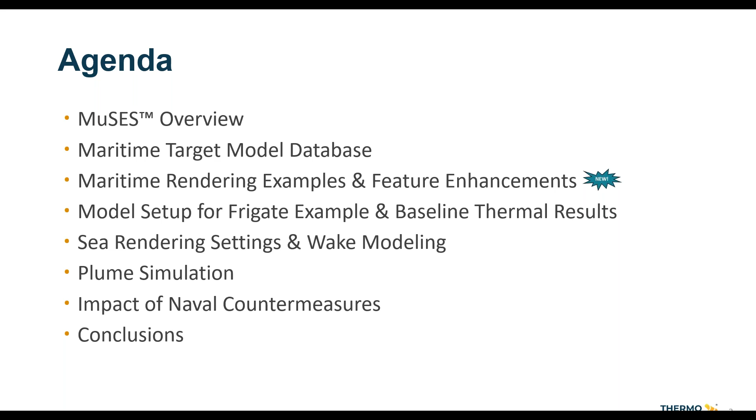We'll start out with an overview of MuSES. MuSES is a thermal solver and EOIR rendering tool, which takes inputs such as a 3D CAD geometry description, part material thicknesses, thermal properties, and component heat sources. Also taken as input are boundary conditions from environmental sources, such as sun location, the sky and background for radiation exchange, air temperature and wind speed for convective heat transfer, and terrain or sea properties to properly set up the analysis environment.

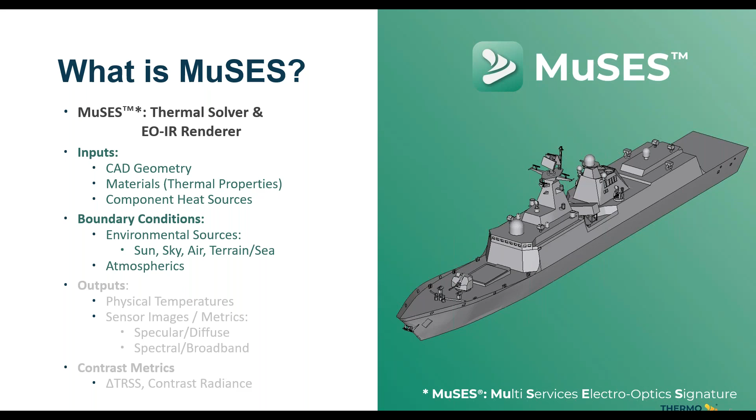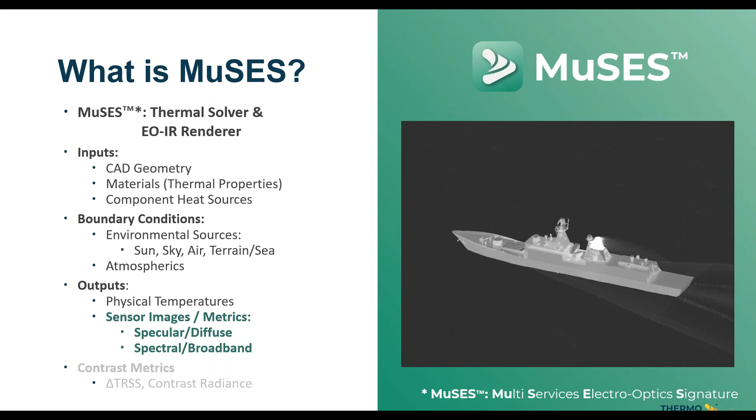Once these inputs are combined, we get a physical temperature prediction of the target. Each element has a temperature result, and you can graphically see this gradient across the target over the simulation time. Then we can also compute the radiance or apparent temperatures for each element, and from there, images can be rendered from the perspective of a virtual sensor, which can be specular or diffuse, as well as spectral or across a broadband. And we can also get contrast metrics such as delta TRSS and contrast radiance.

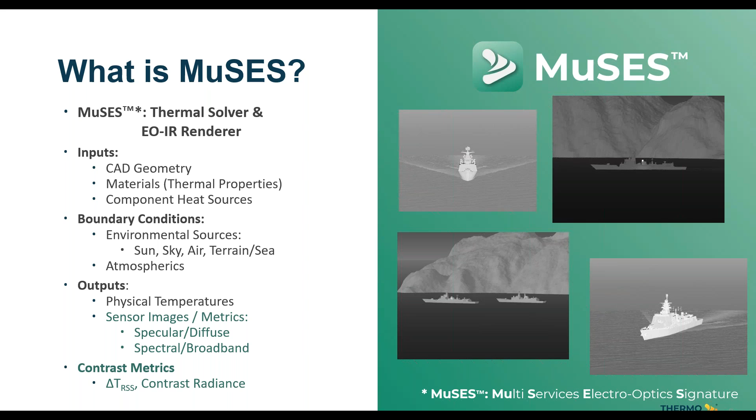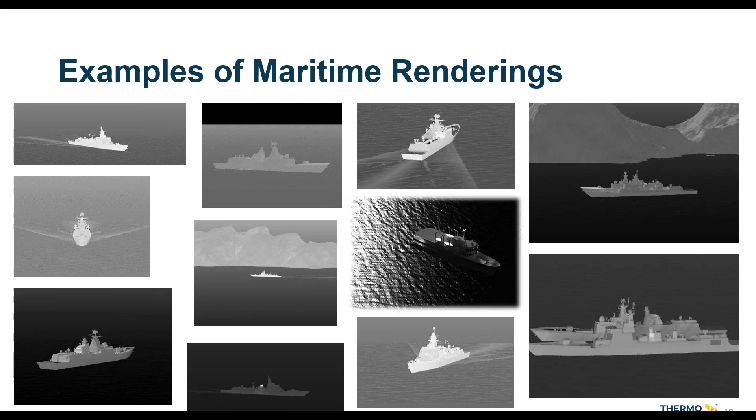Oh, Madison, sorry to interrupt. Can you switch back over? You're showing the wrong screen currently. Oh, not sure how that happened. There we go, does that work? Perfect, thank you. Okay, yep. I don't know what happened. Sorry about that. All right.

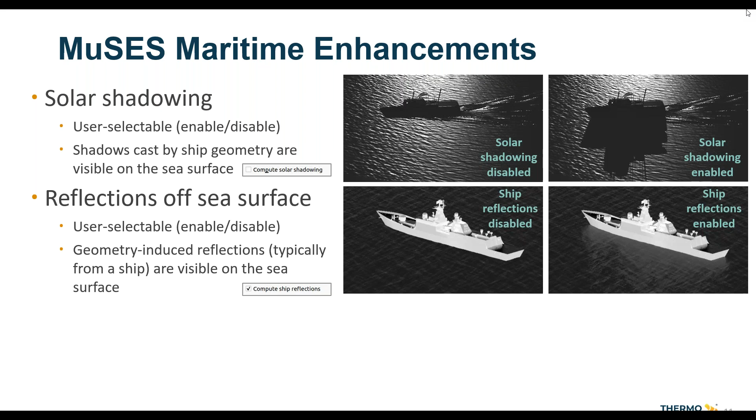Users can also enable sea surface reflections. The image on the right pictures geometry-induced reflections of the ship that are visible on the sea surface.

Now we'll move on to setting up a maritime model using MuSES. We'll need to set up the model environment and can set up a water background for maritime purposes. On the right is our user interface for these settings. Weather can be supplied via a text-based weather file, which contains air temperature, wind speed, and other meteorological parameters. The top image shows where this natural weather file can be selected.

Then a water background type is available for both faceted and unfaceted backgrounds. The bottom right image shows the interface where the background settings are selected. Water temperature is able to be specified or calculated here, and simulation methods, solar absorptivity, and surface attenuation can be adjusted. Selecting the paint code option will allow you to change the sea state, which will then change paint parameters based off of the environment wind speed.

The example model we are looking at today is the Type 054A frigate. The geometry of this ship is divided into 298 parts and has around 73,000 elements. The parts are grouped into appropriate assemblies and assigned proper attributes like material properties and thickness, convection type and parameters, optical surface properties that are housed within paint codes, imposed heat, and initial conditions.

On the right, you can see the ship displayed by different properties. The top image shows the ship colored by convection type, the middle is colored by paint code, and the bottom image displays each part as a unique color.

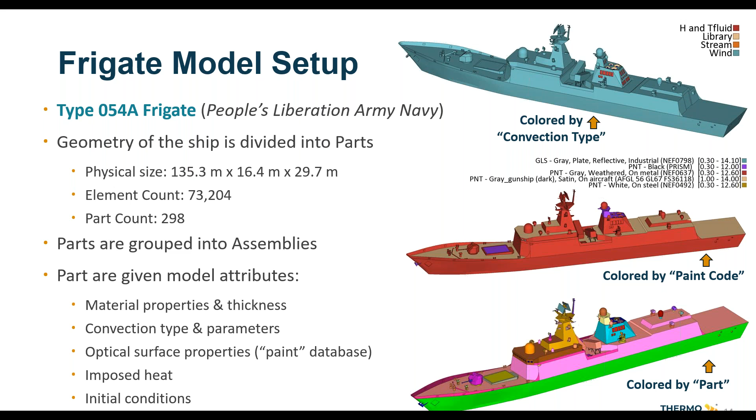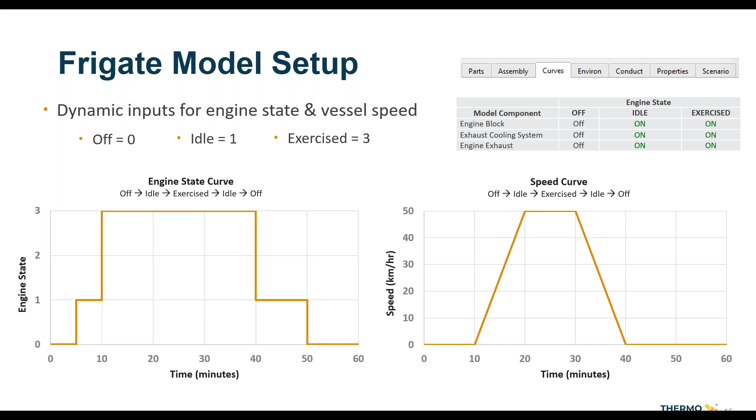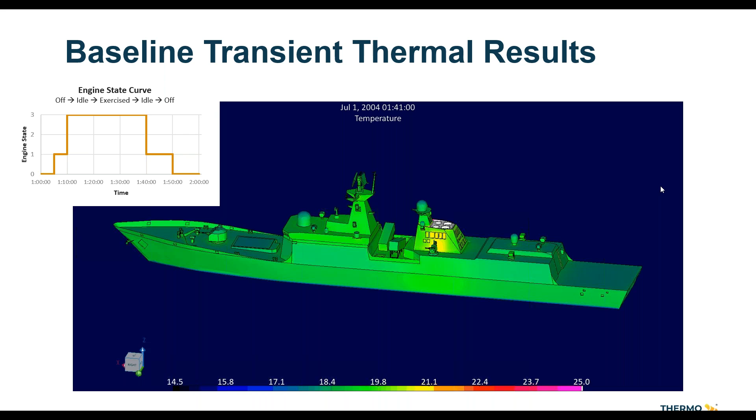Okay, and now I'll hand it over to Corey. Thanks, Madison. I'm going to switch the screen presentation here, 1 second. All right, hopefully that's showing up for everybody. Does that look good, Chris?

MuSES allows for unstructured seas to be rendered, where the sea radiance is going to vary pixel by pixel, but there are no explicit facets for the geometry that capture waves, just the radiance effect of the waves. But what we're going to look at today is focusing on the structured sea, where there are geometric facets that are generated to represent the sea of choice for the user.

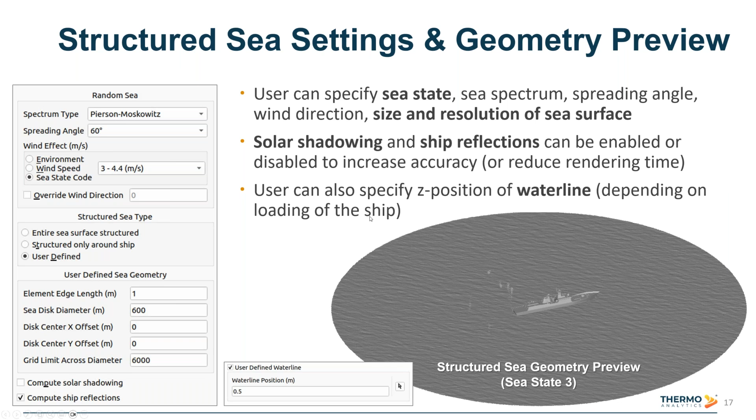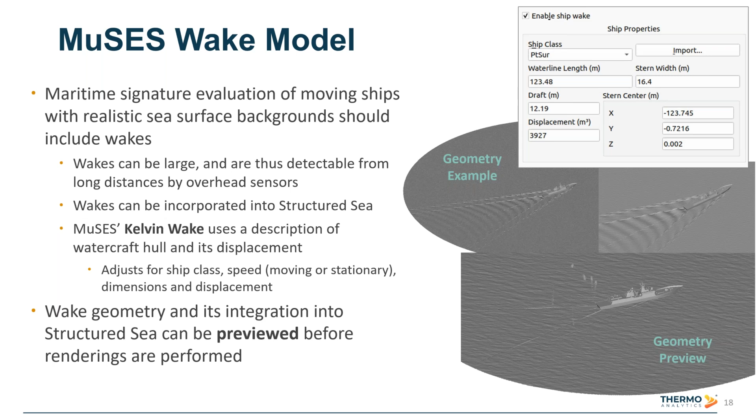Okay, so now we're going to move from wakes to talking about plume modeling a little bit. So MuSES allows users to incorporate plume radiance into EOIR signature renderings. And the way this is done is a CFD analysis is done in an external tool, and the volumetric CFD results from that tool are used to determine the plume signature. And so the output of those CFD tools are things like the temperature distribution in the volume and the gas species concentration in the volume for the different species like CO2, H2O, and soot that are typically present in the plume itself.

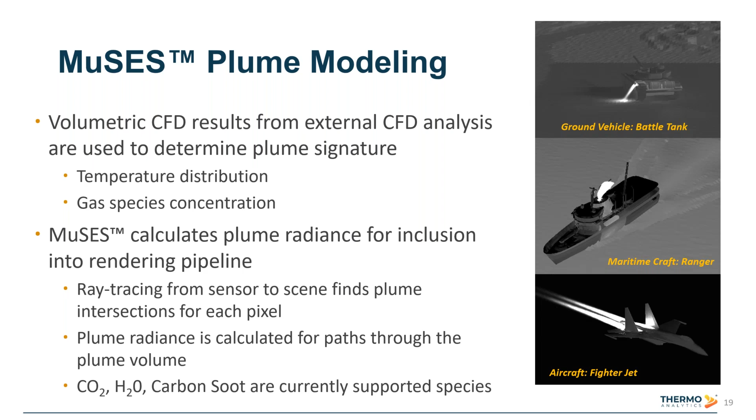So now we'll move on to talking about a few different naval countermeasure examples and show how the effectiveness of these countermeasures can be evaluated with MuSES. And the purpose of this is not to make recommendations, but just to show some demonstration examples.

And we'll be looking at 3 different countermeasures in today's webinar. The first being ambient exhaust entrainment. The second being the application of water wash to the ship's surface. And the final one being the inclusion of flares. And so we'll have a before and an after version of the frigate to compare so that we can see the impact of each of these 3.

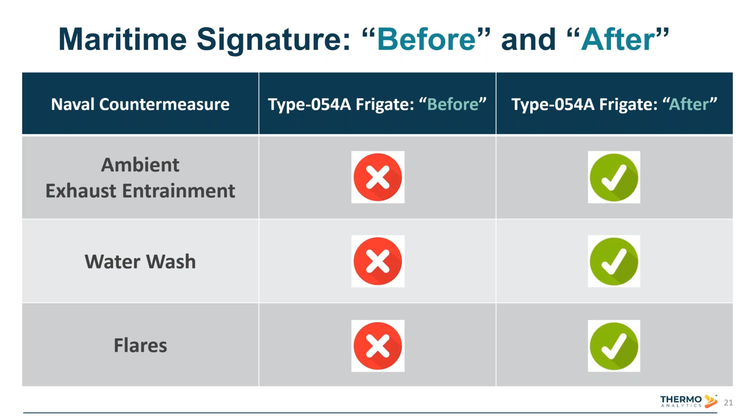First, we'll start with the ambient exhaust entrainment. The idea here is to cool down the exhaust air prior to exiting the vertical stacks of the ship. If you look at the reference geometry shown in the lower right of this slide, you'll see the engines and you'll see 4 different vertical exhaust stacks that come out the top of the ship. The idea here is to mix ambient air forcibly into that exhaust flow so that by the time it exits the top, it's cooler than it would have been otherwise.

And because the plume is often quite warm, cooling it before it exits can be a way to really reduce the signature of the ship, especially in the midwave. So by forcing ambient air into that flow, we can make sure that the exit plume is a bit cooler. And this is kind of diagrammed in the images in the upper right.

So you see in the no entrainment example, exhaust flows from those engines going up and out. And then the with entrainment example to the right of that, you can see individual fluid nodes depicted that are being mixed into that stream all along the way as it moves up vertically to create that cooling effect so that the final temperature as it exits would be cooler. It will also be higher in velocity because we are creating additional flow rate by forcing this entrainment. So how does this impact what the plume looks like?

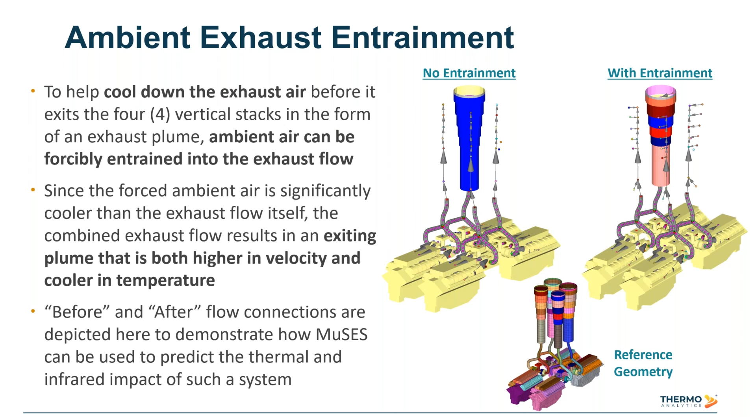On this slide, we're taking a look at some cut plane views of the CFD results that were obtained for this. The 2 images on the left with the blue background are fluid temperature results. And again, that's for a single 2D cut plane that's kind of going through the center of the plumes. The 2 images at the right with the dark red background are showing fluid velocity.

So if we take a look at the top 2 images, that top row is the no entrainment case. And you can see the fluid temperatures coming out are quite warm. There's a pretty big portion that's that dark red saturation color. That's the high temperature here. Whereas if you look below it in the with entrainment case, you can see the temperatures are certainly cooler.

And then if you look at right, you can see that with entrainment, the plume velocities are a bit higher. As you see, the portion that's saturated with that dark red color is a little bit bigger. And that's because of that added velocity that's coming from the forcible entrainment.

Also, it might be interesting to point out here that the frontmost stacks are smaller in diameter than the rear stacks, and that's why, as you can see in the upper right image, the front stack has higher velocity than the one behind it, and that's a diameter difference. That's something that shows up in the CFD results and then has an impact on the signature results.

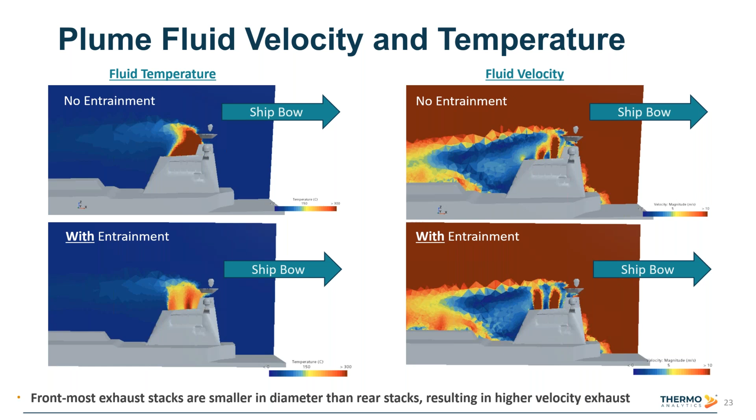So this shows how the fluid temperature and fluid velocity is different with this ambient air entrainment, but what kind of impact does it have on the signature renderings? To figure that out, we're going to use MuSES to incorporate these plumes into our signature renderings and take a look. And so the two images that I'm showing here are the before version of the frigate, which has the standard exhaust plume with no ambient entrainment.

The image in the upper left that has the false color palette, that's a radiance image. You can choose to display your results in radiance or apparent temperature, and you can choose from a variety of different color palettes. In this case, I chose kind of a rainbow color pattern for the radiance image and a grayscale palette for the apparent temperature version that's shown below.

So the upper image is kind of zoomed in on the stack, so you can see all the pixels that are white there all exceed the saturation limit that we've chosen, in this case being 5 watts per meter squared steradian, and the black and white image below that is zoomed out a little bit farther so you can see that plume in context with the rest of the ship and a little bit of the water around it. So that's the before frigate.

And if we then take a look at the after frigate, these are all using the same color scale limits on the left hand and right hand images. So we can see that the number of plume pixels on the right that are saturated and above that limit where it would be white is quite a bit fewer than on the left, indicating that it's certainly much cooler, and we see that in the apparent temperature images below as well.

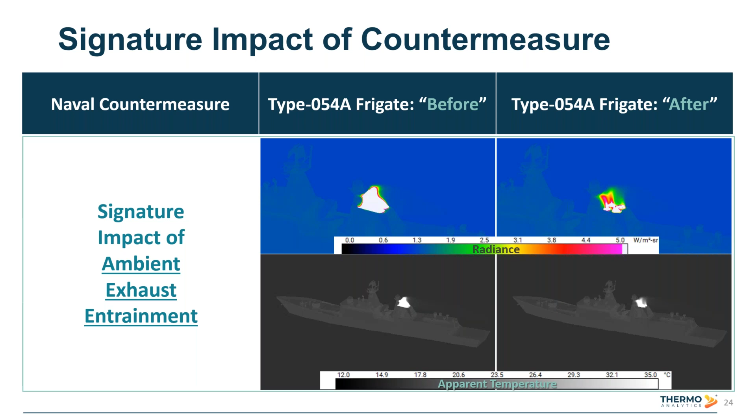But we could see that it definitely makes a difference in terms of the plume radiance. And if we want to quantify this difference, there's a few different ways that can be done. One of the ways is using a delta T RSS metric, and I'll explain that briefly. Essentially what that does is it looks at the apparent temperature of the target, the apparent temperature of the background, the standard deviation of target pixels, and it's trying to help describe the average temperature difference between the target and its background. So that can be a way of quantifying the difference in these images in a single number.

And so here are two renderings. On the left is the before ship, on the right is the after ship with the ambient entrainment. And you can see the numbers there showing the delta T RSS numbers in apparent temperature units for these two scenarios and this particular view. So that gives you an idea of the signature reduction that can happen with this and how MuSES can be used to quantify this. There are other ways to quantify it, including radiant intensity and contrast radiant intensity and so forth.

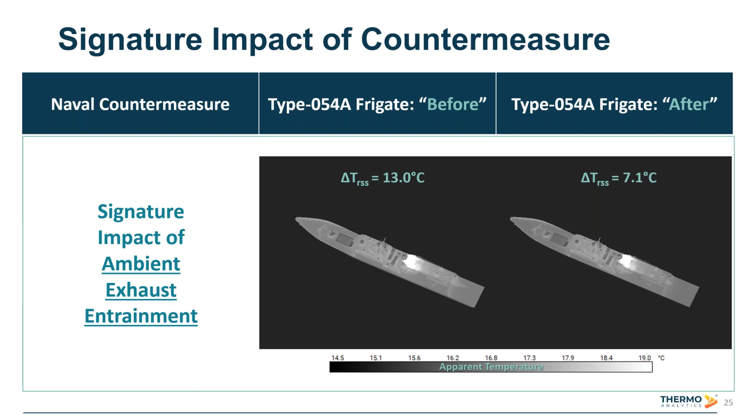Okay, so now we'll move on to the next countermeasure. Assuming that this ambient mixing has been done to cool the plume, what might be done in addition to this? So we're going to talk about water wash, and this is another enhancement to MuSES that was made recently. This lets people incorporate the signature management technique, sometimes described as water wash. The idea here is that seawater is being pumped through a series of pipes and then sprayed on typically the vertical ship surfaces to cloak that underlying surface temperature by trying to mimic the temperature of the surrounding sea.

So the more that the side of the ship looks like the surrounding sea, the closer they are in temperature to one another, the smaller the ship appears, and the lower its signature; that delta T RSS number would get smaller because the average difference is getting smaller. And MuSES lets users include water wash in their thermal simulation, and also include the effects of that in renderings. And so the dialogues at the right show how that can be enabled, and they also show the user inputs.

So users can specify initial condition temperatures. They can specify the source of the seawater. In this case, we're using the same water that's being used for the background. We're using that as our upstream part. And you can specify the flow rate in terms of a mass flow rate or volumetric flow rate. So that's the rate at which that water can be applied, in a variety of different units. So the higher the flow rate, the more likely that surface temperature is going to be close to the seawater temperature, its upstream part. The user can also specify the optical surface properties they want to use in the cases where it is wet and the flow rate isn't 0.

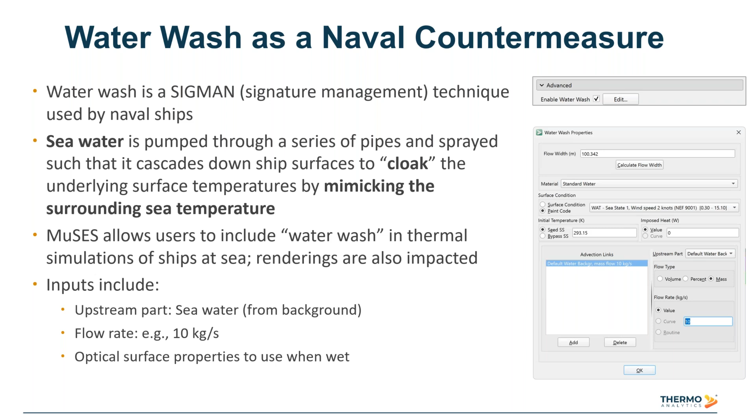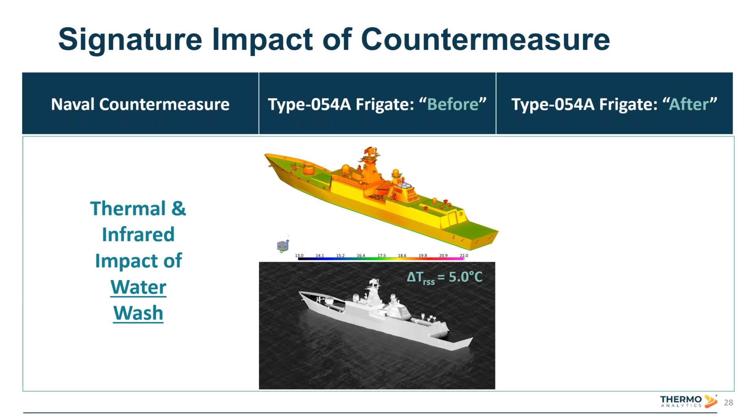What about the signature impact? So again, for reference, in the upper left is the before ship temperatures, and below that is a radiance image of the ship, a long wave rendering. And we can see that the delta T RSS is 5 degrees in this particular scenario and view angle. And the after ship, that's reduced down to 3.7. And you can see the hull of the ship there is cooler, and thus its radiance is much closer to that of the surrounding water. The ship reflections that you see in the water are cooler as well.

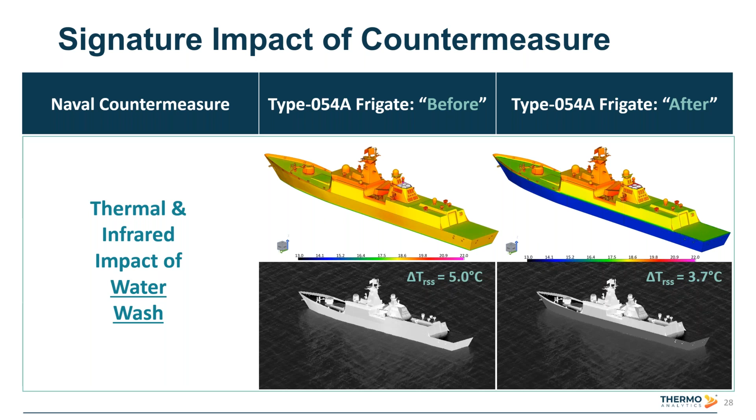So now we move on to the final countermeasure that we're going to talk about, which is the incorporation of flares into MuSES imagery. So animated flares can be inserted into MuSES animations, and we're doing this by means of a CoTherm process.

So CoTherm is a tool that we developed that allows for the co-simulation of tools, the automation of complex processes. It looks like a block diagram with sort of sequential and concurrent steps. So you can see the flow of information, the flow of control. And so we created a CoTherm process to do this flare animation.

And what that process assumes is that the flare can be described by a radial distribution of TET elements. They've got a parabolic trajectory that's specified by XYZ velocity components. As you can see by the example that's shown below, we see on the lower left a static image in the MWIR from a ship with some flares going off, and next to that is an animated version of the same where the sensor is kind of moving in a circle around the ship.

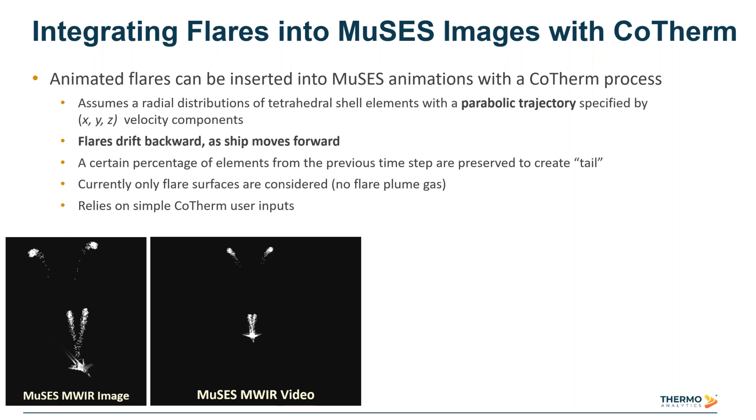And then you can see as the flares are going up and coming down in a parabolic trajectory, they're also drifting backwards because the ship's moving forwards. And these are all user-controlled settings in that CoTherm process. It's changing over time. Elements are being added, elements are being removed. This creates the tail. And so with a few different simple CoTherm user inputs, we can add those to the ship model as well.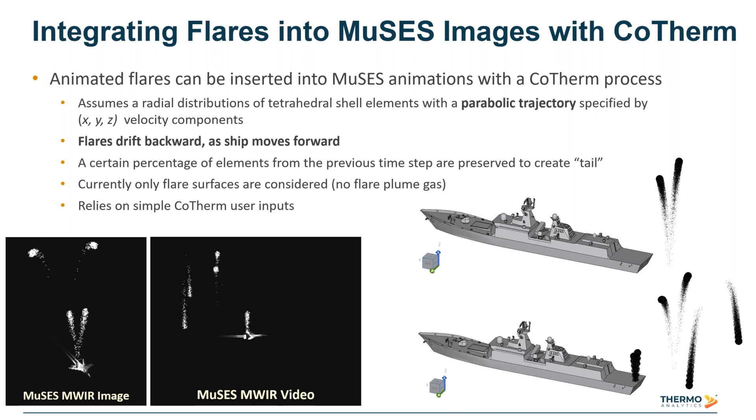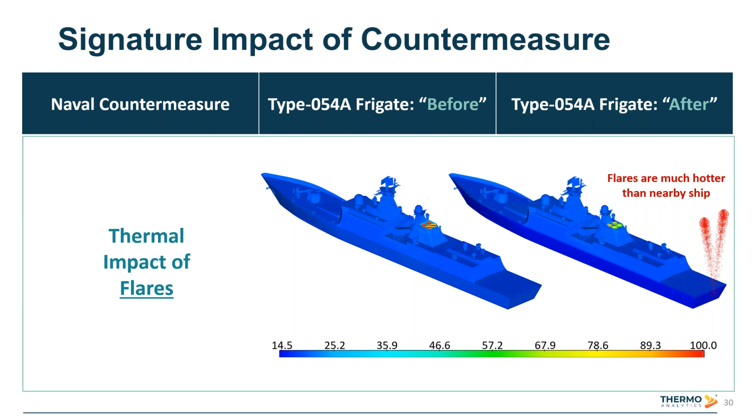And the idea would be this could be a distraction to potentially an enemy missile or something that's looking for pixels in the scene that are really bright, and basically creating a false signature to be deceptive, like a decoy. And so what does this look like in the infrared?

So here we see an animation that shows the incorporation of these flares into the simulation. In this animation, which is 10 seconds long, this is 10 frames a second, so there's 100 different renderings that have been stitched together to create this animation. And so the geometry is changing as those flares are going up. The thermal calculations are being done, the renderings are being done. You can see the flares going up and coming down.

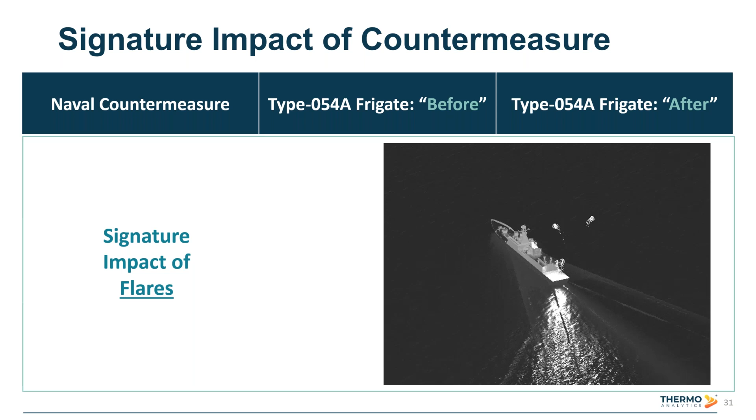You can see the extreme radiance from those flares reflecting off the horizontal stern of the ship there. You can see the reflections off the water as well. You can see a bit of a Kelvin wake there behind the ship. So we could see all these different elements come together, including a reduced plume temperature by way of that ambient entrainment, a reduced hull signature by way of the water wash that's been applied to the entire hull surface, and then the incorporation of these flares as a distraction technique.

So in terms of wrapping up, I think we've shown how MuSES can model high-value maritime targets and do so accurately with realistic sea backgrounds. MuSES has been used in a variety of different maritime validations in the past, and some upcoming ones as well. Madison described some of the recent feature enhancements that have been added to increase the realism of maritime backgrounds and improve contrast calculations and signature management evaluations.

We've also discussed a variety of countermeasures like exhaust plume cooling and water wash to minimize the ship's infrared signature, and also showed how flares can be incorporated to create signature distractions to help avoid detection.

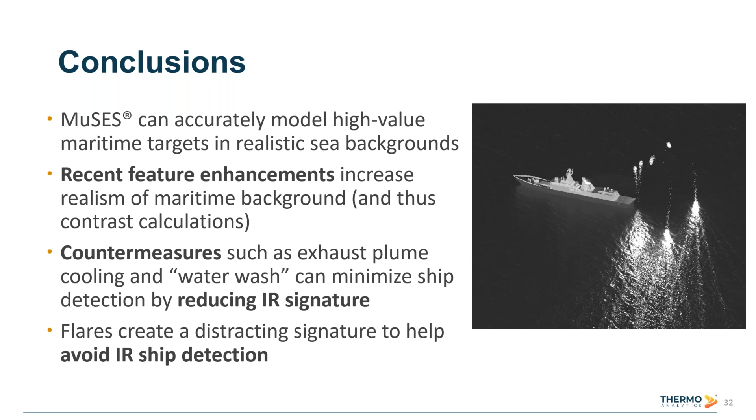Finally, we just wanted to mention some of the upcoming defense webinars that we have later this year in case you're interested in some of these other topics. We're going to be doing a multi-part series later this year. The first one being an introduction to MuSES and artificial intelligence and machine learning. So using MuSES imagery for AI ML applications, and then some more specific topics related to that.

The first one focusing on UAV, drone systems, and birds, the detection and discrimination of those. Then one on multimodal remote sensing of humans in different cluttered scenes. And then finishing up with overhead persistent infrared, or OPIR, applications for AI ML. So that's the tentative plan for later this year, August through November.

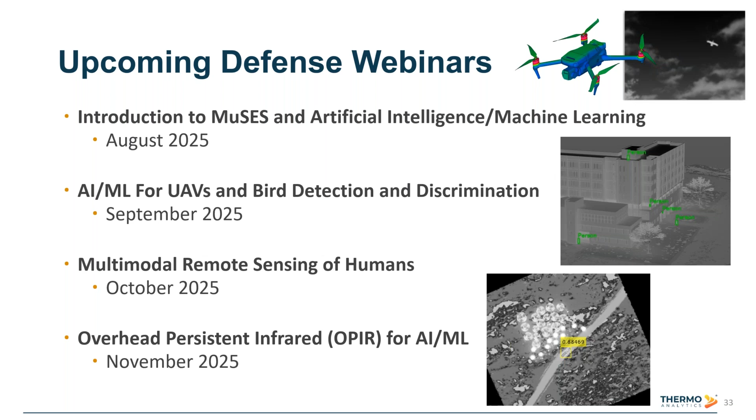What target models do you have for simulation in MuSES? Yeah, that's a good question. So Madison showed a slide with just a few maritime targets ranging in size from a small life raft or a RIB, rigid hull inflatable boat, to fast attack boats, aircraft carriers, cargo ships, frigates, destroyers. But we also have models of other things that might be in those scenarios as well.

Might be a person that's in the water that needs to be rescued, or maybe it's a littoral scene where both the water and the coastline are present in the image. So obviously beyond the maritime targets that we showed, we've got a very large variety of ground vehicles, UAVs, and human personnel. So ground, air, sea, humans, you name it, we've got a lot of targets.

But beyond the ones we already have in our database, we also have the ability to create custom targets if what you're looking for is not one that we already have. We've got a team that can create that for you.

Good question. Thank you. Which version of MuSES is needed for water wash? Yeah, good question. So version 2025.1 that just came out to the public, I believe middle of April this year, is the one that you'll need to have water wash working as we described in today's webinar. So you're going to want to get the newest release that came out this spring. Thank you.